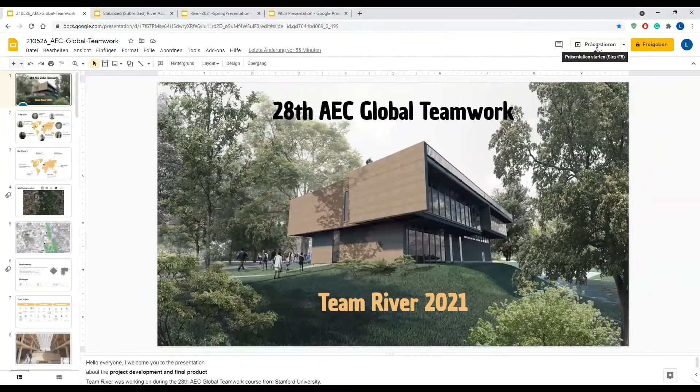Exactly. And I saw, Conrad, I think you need to enable me to share the screen. And then I can directly go into it. Yeah, I'll let you share. Give me a sec. Okay, you should be ready to go now. Yeah, perfect. I will also talk a bit more about the requirements and what the goal of the course was during the presentation. So I won't tell you about that now. Okay, don't want to see myself. You can see the screen? I think, yeah.

Okay, perfect. Then welcome everybody, and I will present you today the project development and the final product of Team River 2021, participating in the 28th AEC Global Teamwork course from Stanford University. And Team River, that's 7 people from 7 universities, from 5 disciplines and 3 different time zones. And the objective of this course was to do collaborative teamwork, to develop our skills in communication, collaboration, and coordination, and as well to set up our mindset to integrate the design, the model, the schedule, and the costs

by building a university building. We were also accompanied by an owner team of 6 owners that were distributed in 4 different countries, and they were mentoring us and advising us during this whole journey. So we met every second week and we showed them our progress and we discussed our ideas. And now I will introduce you to our site, which is located in Weimar, Germany, in the Goethe Park next to the River Ilm. And some site hazards of this site is that Weimar is a UNESCO World Heritage City and it needs to be treated accordingly.

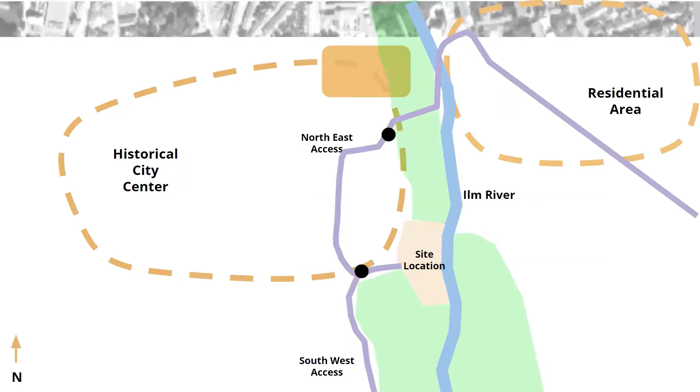Also, we have wind coming from the southwest and tight intersection roads and access roads. But this challenge actually enabled us to really work and focus on a small kit of parts and to have these vehicle restrictions and to integrate them into our design. Also, the hazard of a shallow water table and flood risk was many times discussed, and we found out and investigated several solutions for the different building concepts.

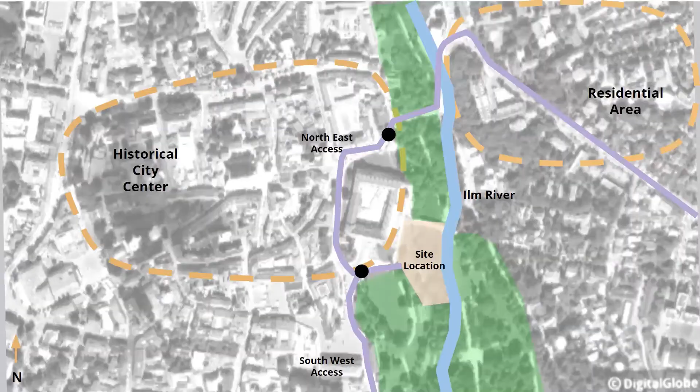So the course is about building, designing, and constructing a 3-story university building for collocated and online courses. And we were given 2 footprints, to see on the right, the L shape and the square shape. And also there were given certain requirements for the functional spaces like the area, the orientation, or the room height. We were also not allowed to build more than 9.1 meters above ground level. And we set our budget to 12 million euro, and it was also restricted to have the construction completed by end of September 2025.

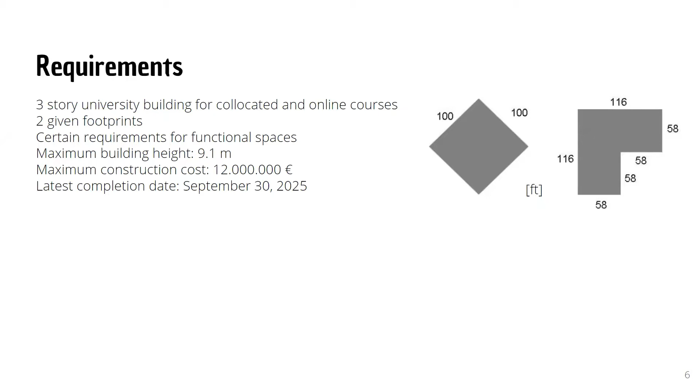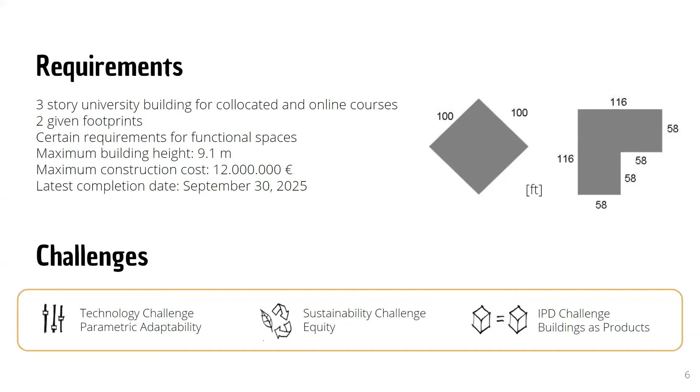Furthermore, there were 3 interesting challenges from the industry partners. So first of all, we had the parametric adaptability challenge from Buro Happold, then the sustainability equity challenge from AR Green Consulting, and the buildings as a product from DPR. And with all these requirements, we started into the concept development phase in the winter quarter, where we were working on 4 different alternative solutions, and in the end evaluated them in a decision matrix approach. And during the project development phase in the spring quarter, we then focused on this winning concept and elaborated the details and some improvements.

We also created further team targets for our team. They were steering our design from the very beginning, and we divided them into the categories design, user experience, and construction and use.

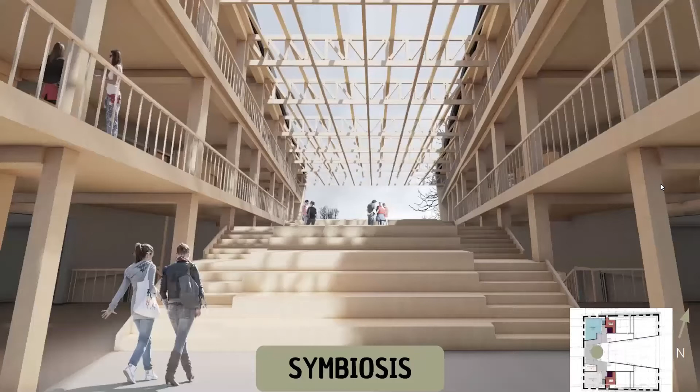And now I'm going to introduce you to our first stabilized concept called symbiosis. So symbiosis is any relationship or interaction between two dissimilar organisms. And there are three subcategories, which are mutualism, where both organisms benefit, commensalism, where one benefits and the other is unaffected, and parasitism, where one benefits and the other is harmed. And symbiosis was one of our main gestures integrated into our building.

So we started with our first concept, which had a quite long cantilever, and this was because we wanted to fit all the room requirements. But there came also the idea to twist and expand the building, which you see in the second concept. But after some mainly structural mentoring, we really found out that this structural system is very demanding and it limits the architecture. Furthermore, we decided we needed to include some of these inclined columns, but they are again taking space away. So we had to step back and do some more brainstorming and interdisciplinary coordination.

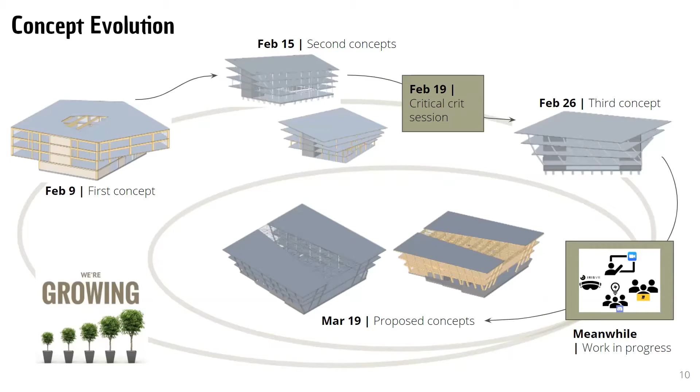And that led us to the decision that we can either expand our building or twist it. And also there came the idea to have this stepped basement you see on the bottom right picture. And with this, we gained more space below the ground, and also it solved the problem of the shallow water table. And this led us then to this proposed concept, symbiosis growth and symbiosis mesh. Our architect had the overall vision to strive for mutualism, accept commensalism, and avoid parasitism.

The structural engineers were on one side focusing on sustainable materials like glulam and CLT. And on the other hand, we were working with steel and 3D printed smart slabs for integrating the MEP ducts and the connection to the columns. Our MEP engineer was firstly focusing on building orientation and also on the relocation of some trees in the park. And then we decided for a primary system to use the electric boiler for the growth and the ground source heat pump for the mesh. And this was complemented with secondary systems like displacement ventilation and radiant floors.

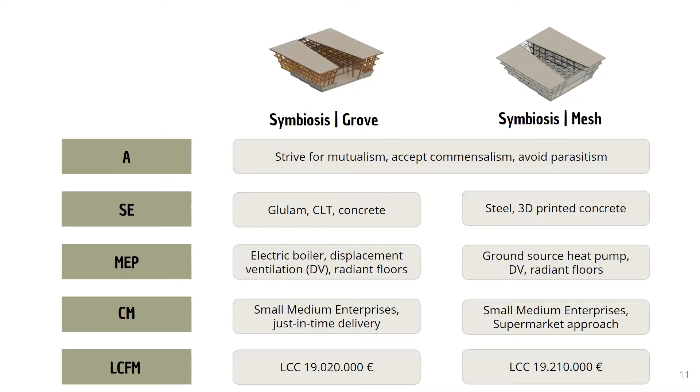And for both concepts, our CMs decided to use sustainable small-medium enterprises. The material for the Grove was provided by just-in-time delivery, and for the mesh, we had an offsite storage, which led us to focus on the supermarket approach. We also had a lifecycle financial manager in our team, and he focused on risk management, sustainable target value design, and he was also calculating the final lifecycle costs.

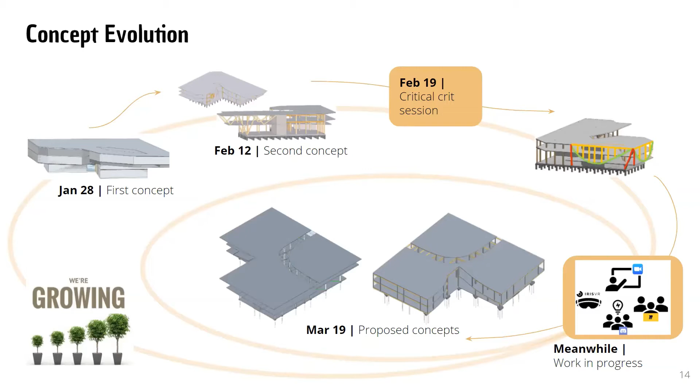Again, for this concept, we had very long cantilevers in the first and second concepts. And with some mentoring, we knew that we actually should prepare different structural systems for the different materials chosen. So we were working on more solutions for this cantilever, like, for example, the queen post trusses you see on the right. But we were not really happy with this solution. So we again did more brainstorming and coordination, and we decided to rather have less cantilever, but have it on more sides of the building. And this then resulted in the proposed concept, Next Year Spring Sprout and Next Year Spring Steel Flower.

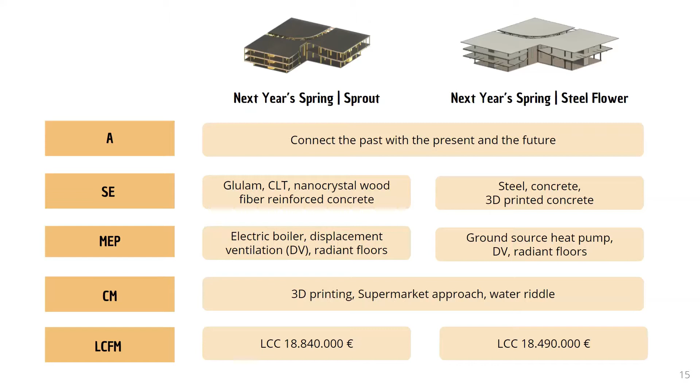So our architect focused on connecting the past with the present and the future, with a main focus on the rammed earth. And the structural engineers were again working with sustainable wooden materials like glulam, CLT, and this nanocrystal wood fiber reinforced concrete. And on the other hand, for the steel flower, we were again working with steel and more innovative solutions with 3D printed concrete. Our MEP was again working with the building orientation and also focusing on the rammed earth insulation. The construction managers were mainly focusing on the 3D printing process, because for the sprout, we planned to 3D print the formwork for the slabs, and for the steel flower, we were planning to directly 3D print the concrete slabs.

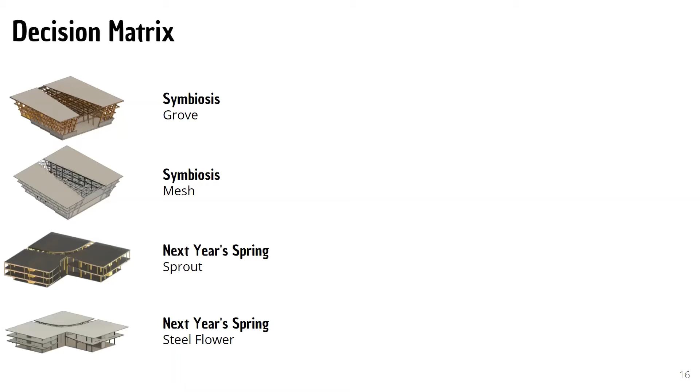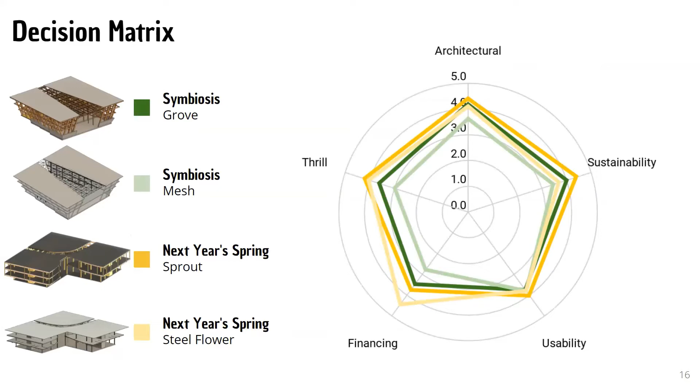And at the end of the winter quarter, we then evaluated these 4 concepts in a decision matrix approach. And we had a few criteria like sustainability, architecture, thrill, usability, and financing. And the winner was then next year's spring sprout. And in the following slides, I will show you which aspects we focused on during the spring quarter and what we tried to improve for this next year's spring sprout.

So first of all, we integrated a further approach, which was intergenerational equity. But what is intergenerational equity? So it's conserving fairness and resources for future generations. And with this, we were actually impacting all 3 pillars of sustainability: the environmental, the social, and the economical.

Also, we focused more on the 3 challenges, what our goals are, how we approach them, and how they impact the future. So for the equity challenge, we decided to work with low CO2 impact materials, and with our green roof, we added a new layer to the park. For buildings as products, we decided to develop a small kit of parts of our building elements, and we introduced key performance indicators to measure the acceptance outcome.

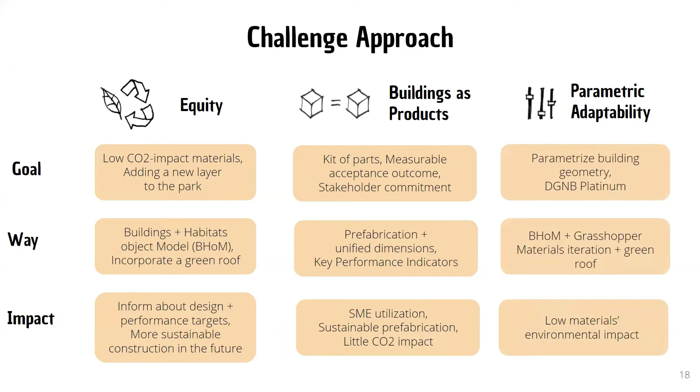And for parametric adaptability, we parametrized our building geometry, mainly the rammed earth walls. And by doing material iterations and including this green roof, we aimed to reach DGNB Platinum. DGNB stands for Deutsche Gesellschaft für nachhaltiges Bauen, and its certificate measures sustainable construction on the basis of several criteria.

One benefit of the public-private partnership between us, Team River, and the university in Weimar is the allowance for an involvement of SMEs and teaching the next generation workforce. This involvement will be through a 10-year VR lab established by the university, and this informs the SME Sustainable Prefab Product Library.

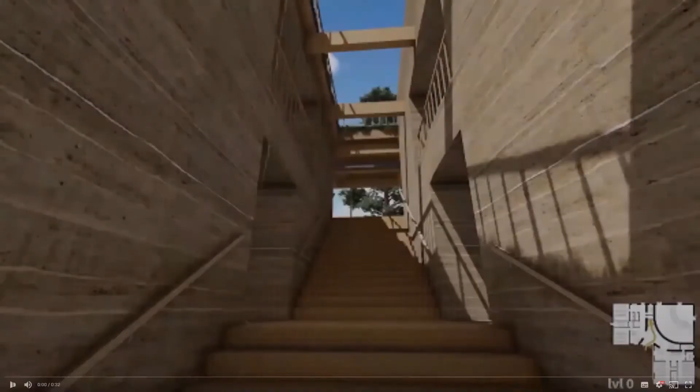And now we start a walk into our building. On the sides, you can see interactive information touch walls, where, for example, information about accessibility for people in wheelchairs or upcoming events is displayed. If we go up, you can see that the middle part is provided with a lot of light. And you can also see these curved rammed earth walls, which are load bearing.

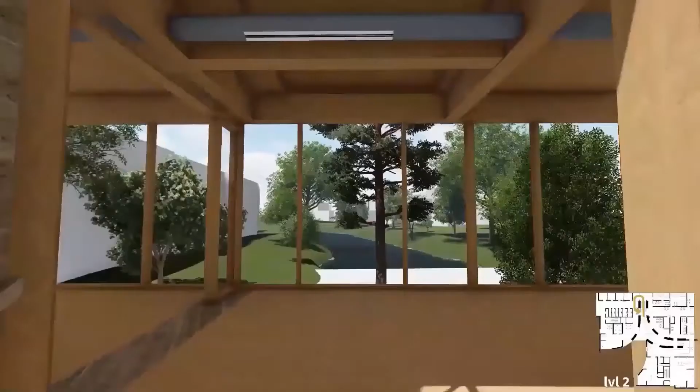There was a quick view to the auditorium, and now we go up through our glass fire protection doors to the student area. And here the more regular rammed earth walls are highlighting the framing.

We solved many integration challenges, but I will just show you some selected ones here. The lateral structural system is composed of the internal rammed earth walls and the CLT shear walls as cores. And for framing and floors, we moved away from using glulam and concrete and now use softwood and CLT panels instead, mainly for sustainability reasons.

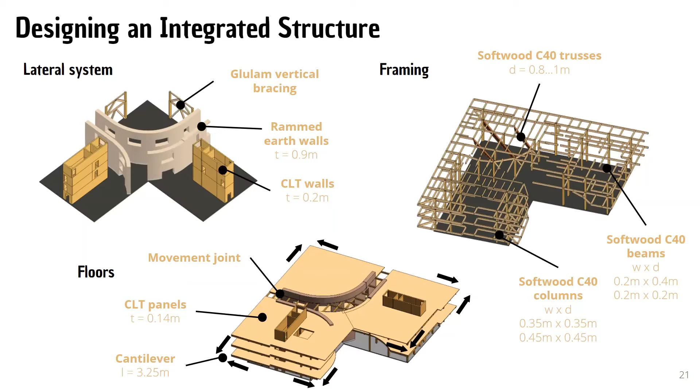This material choice had a positive impact on our building's global warming potential, which was measured with a BOM LCA tool. I will introduce this to you later. Also, it emphasizes how we connect the past to the future. And furthermore, we decided to follow a very regular structural system, which helped us to stick to our small kit of parts.

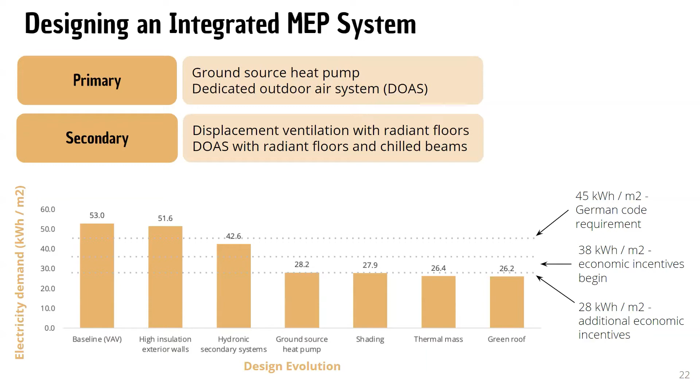The MEP system selection was driven by the local environment, energy efficiency, and unique properties of our building. The ground source heat pump is our primary system due to its compatibility with our site. And the rammed earth physical properties enabled us to use secondary systems which previously were not considered. This allowed us to focus more on the optimization of the ventilation systems.

So now we are located in the open student area on the second level, where the students get a chance for informal interaction with professors, and they are also provided big and open working areas. And the big facades open up the view to the beautiful Goethe Park.

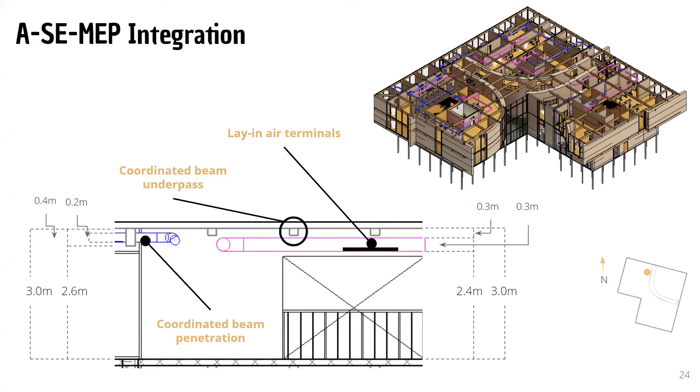We coordinated MEP and structure systems by beam underpass and beam penetration, with consideration to only penetrate in the middle 50% of the beam span and the middle 50% of the beam depth to avoid the shear and moment critical zones. Our goal was also to reach a minimum of 40% prefabricated items, including rammed earth walls, beams, CLT floor panels, columns, ducts, and curtain wall panels.

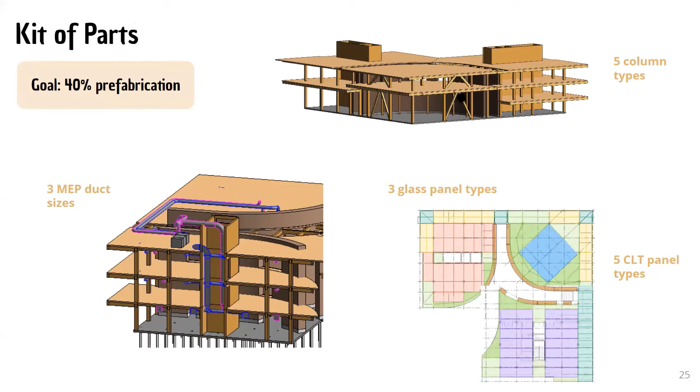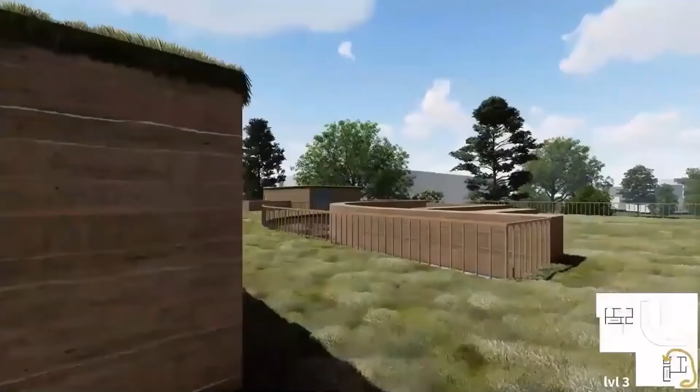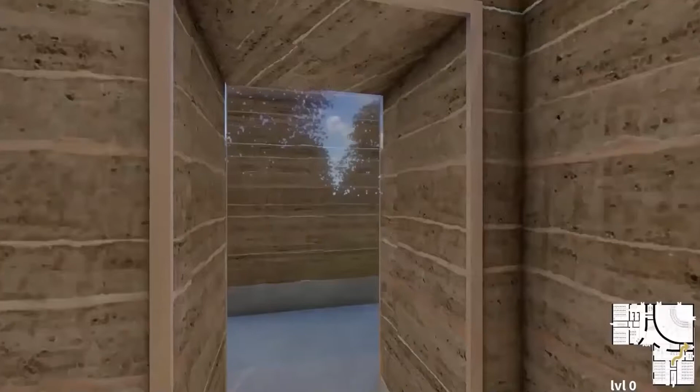The green roof we integrated into our building you can see here, and we also see the continuation of the load-bearing rammed earth walls, which provide shelter from the southern wind. Rammed earth is a central and sustainable material. It regulates the indoor humidity, it provides good thermal mass, and it's beneficial in terms of cost and availability. And here on the ground floor, you can see this gray layer. This is a 40 centimeter concrete layer, which provides flood protection to the rammed earth.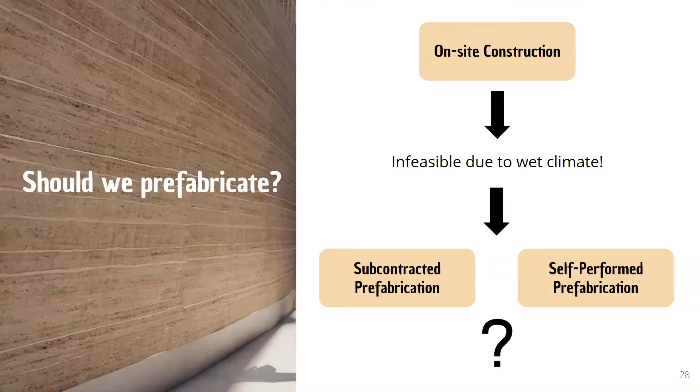Building with rammed earth is not so common anymore, and we had to ask the question, how do we construct these walls? So we were looking into on-site construction, but it's infeasible due to the wet climate and the flood risks. So we investigated subcontracted prefabrication and self-performed prefabrication. And using 3 KPIs, we verified that self-performed prefabrication is preferred from an environmental and an economic aspect.

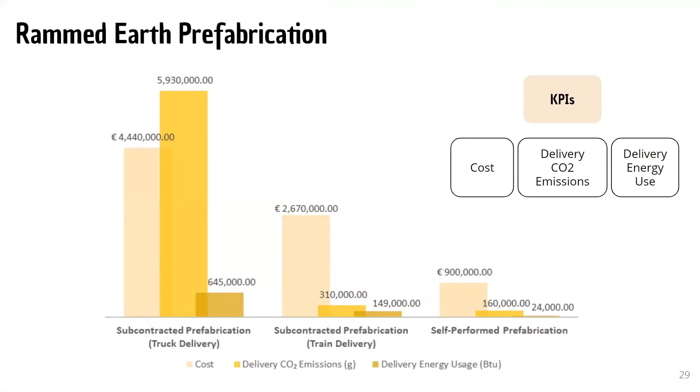And this approach allowed us to focus more on the intergenerational equity again, by teaching the next generation workforce about rammed earth, how it's going to be constructed, and what their benefits are. And besides the prefabrication of the rammed earth, it was also parametrically designed. So from the initial idea, which came from our architect, we had to unify the radius such that we can reuse the formwork. And the formwork is actually the most expensive part when building with rammed earth.

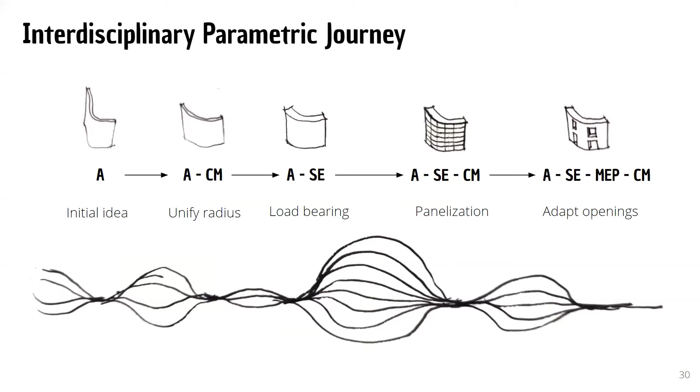In coordination with the structural engineers, we decided to make the walls thicker, such that they are load-bearing. And to follow the vehicle constraints, we had to panelize the walls. In the end, we were also able to adapt openings to the different needs from the disciplines. The building blocks were designed with 4 different parameters in Grasshopper, and they allowed for adapting to changes in the building process.

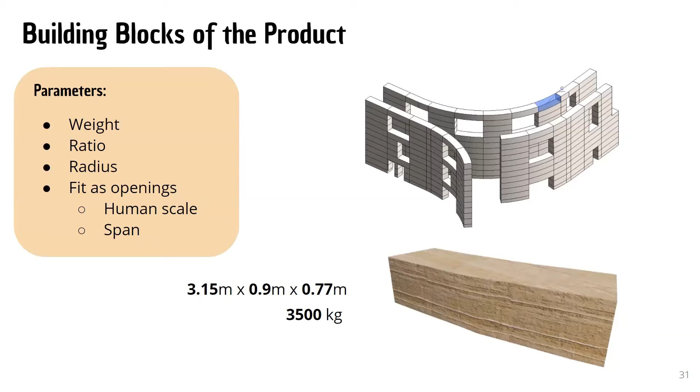So our process goes from procurement to closeout, and our first stop is at the SMEs. So most of our suppliers were around 20 kilometers away from our site, and they were uniquely identified to take care of the kit of parts and a sustainable construction process. Then the supermarket is the home to the prefabricated packages. And it is also where the rammed earth walls are fabricated by the next generation workforce. But I have to add here, it's only the architectural rammed earth walls. The structural ones will be prefabricated by professionals.

So we then move into the quality approval and the quality control for the rammed earth, which is at the Bauhaus University in Weimar, and it follows the same procedure as for concrete testing. The kit of parts and the rammed earth blocks are delivered to site, and can be assembled with the cranes. And using this process and the prefab rammed earth, we are utilizing 93% of our building system from SMEs, and we initially were aiming for 70% there. And we are also at 52% prefabrication when our goal was 40%.

Our process, the life cycle financial management, is seldom applied in construction to its full potential. And through the integration with our life cycle financial manager, we were able to use multiple optimized schedules through ALICE, then the procurement dates from Manufacton, to find the best value for money through liquidity planning. ALICE is an AI schedule optimization software, and Manufacton is a program that links the BIM model and acts as a centralized order and production tracking system. So it helps to track the stages which the supply chain is at, and also it monitors the performance of the prefab packages.

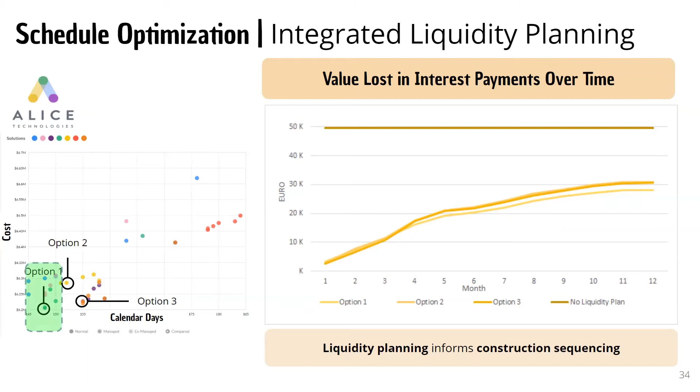A liquidity plan was used to divide the loans over a known period of time. And when there is no liquidity plan, the interest paid is almost twice as much. So comparing the top 3 optimized schedules from ALICE, we found that option 1 with 2 curtain wall crews is the winner. And we were able to save 21,000 euro that would have been paid with no value added.

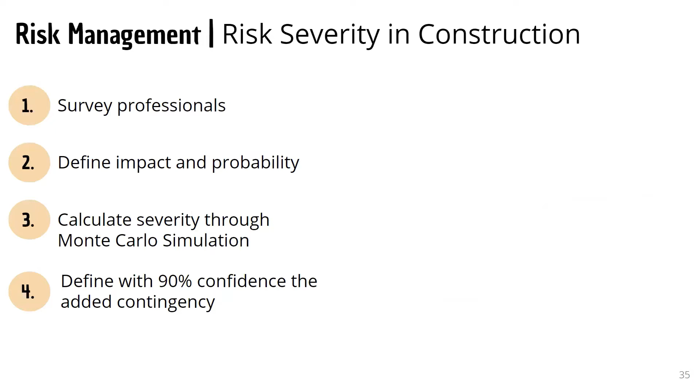Our next step was to look at the risks in and out of construction. And by surveying mentors, we gained information about the impact and the probability of occurrence of accepted risks in construction. The 2 main risks were flooding and the next generation workforce. And their impact and probability were defined and multiplied together to get the severity, which could be predicted with the Monte Carlo simulation.

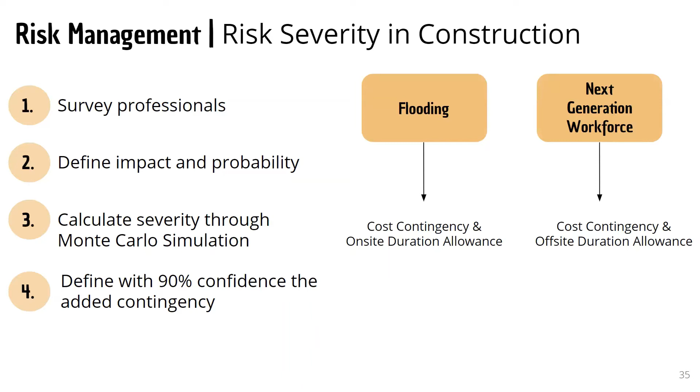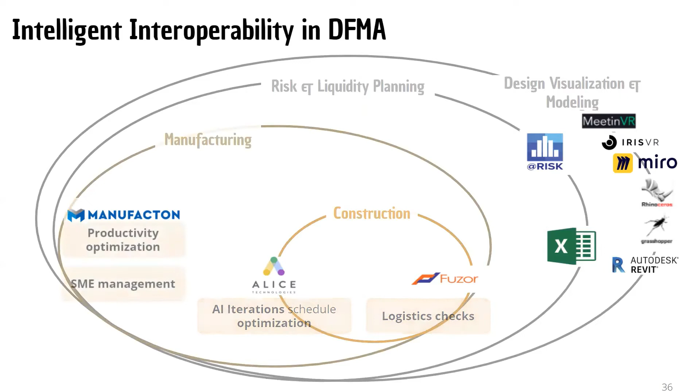So before I take you on the on-site assembly, here's a peek at our intelligent interoperability in design for manufacturing and assembly. In construction, we integrate ALICE and Fuzor to investigate scheduling and logistics. Fuzor creates 4D and 5D simulations of the BIM model and helps to ensure project delivery on time and on budget. Manufacton is used to optimize the productivity and track the supply chain.

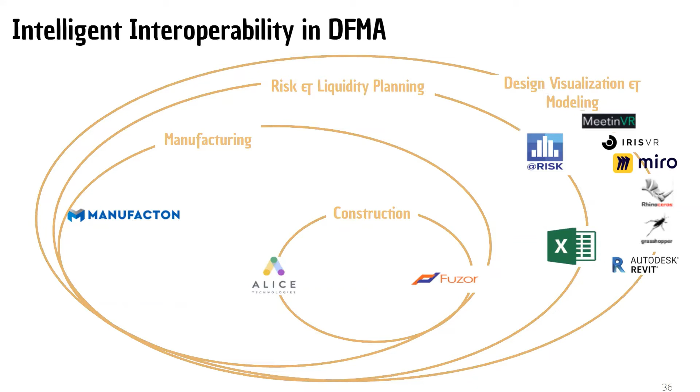And after that, we move into a life cycle with liquidity planning and risk management, which informs supply chain and construction. And in turn, it iterates the design through visualization in MeetinVR, IrisVR, and Enscape, and modeling in Rhino, Grasshopper, and most importantly with Revit. It combines most of the technical software we were using. And using all of this, we created our 5D green design for manufacturing and assembly.

At first, the site had to be excavated and backfilled. Then the self-draining micropiles were installed and the concrete poured and waterproofed.

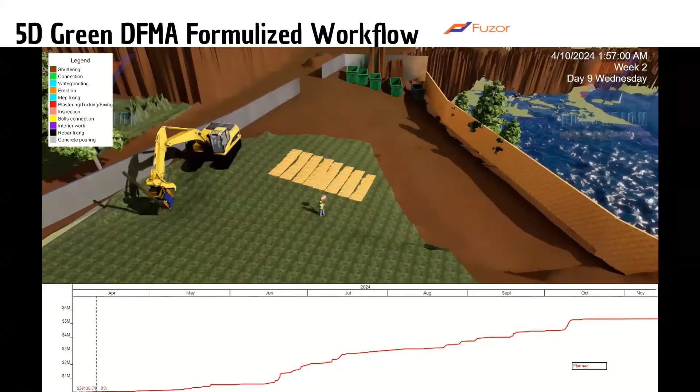Yeah. And this foundation solution helped us to avoid the risk of a shallow water table. On site, there are also 2 laydown areas where the trucks are arriving from the warehouse, and then the cranes unload the trucks and place the elements at the correct position. Our tower crane could reach the entire building footprint, and the mobile crane could only reach 2/3 of it.

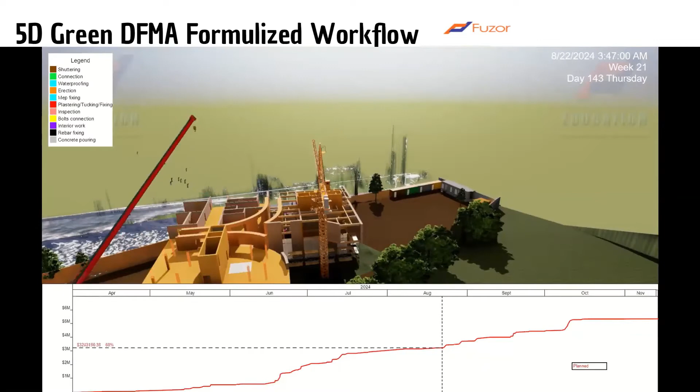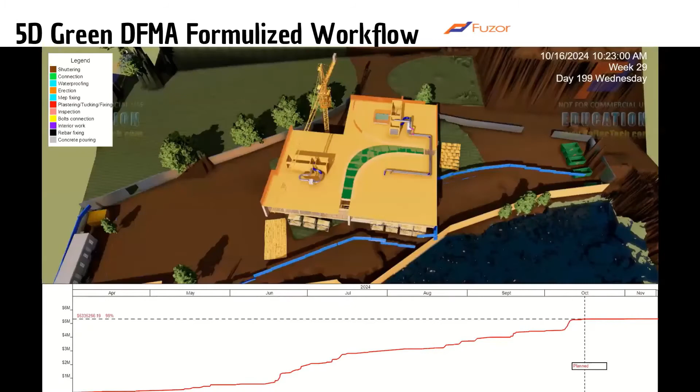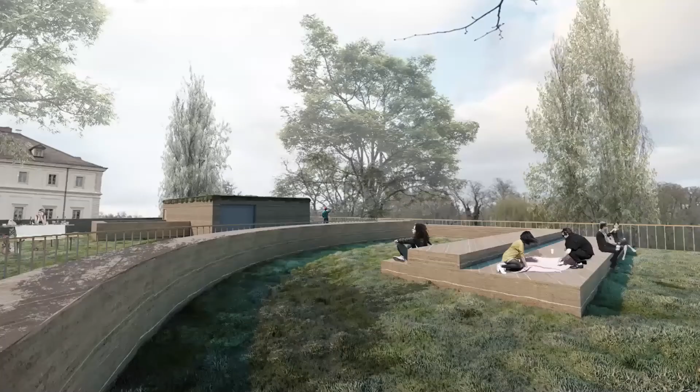And this video is also showing the flood event. So the construction stops during flooding, and the site is secured by flooding barriers. A permanent earth embankment protects the building from being flooded after the construction phase. And after 227 days, the building is completed. And now let's take a quick pause on our green roof before I show you how our building performed against our goals and targets.

So we tracked our building performance against the DGNB standard, and we achieved platinum certification through key design changes such as incorporating a green roof, utilizing softwood framing, implementing a liquidity plan, and green construction, which put in place pollution plans and low noise electric equipment.

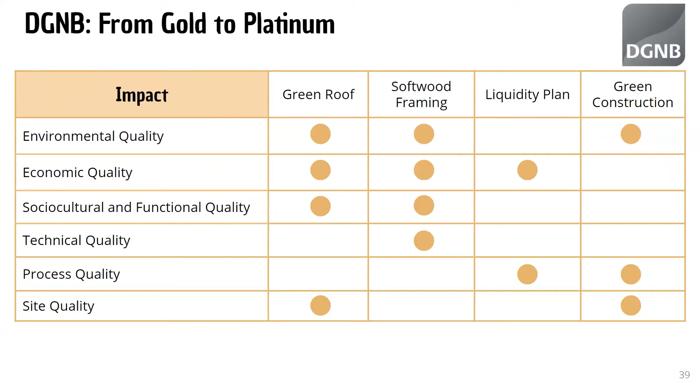We also monitored the environmental and financial impacts of the proposed design changes using the sustainable target value and the target value design tools. So for example, we considered switching from 3D printed concrete slabs to CLT slabs for design and constructability reasons. And we confirmed with the STV and TVD that this change kept us within our targets.

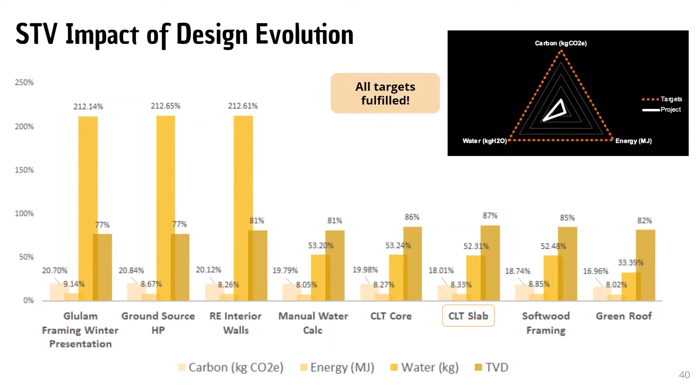And to better understand the impact of these materials, we used this Buildings and Habitats Object Model, BHoM, and its lifecycle assessment toolkit. So this enabled us to understand the embodied global warming potential of our actual materials against the evolving geometry of our building.

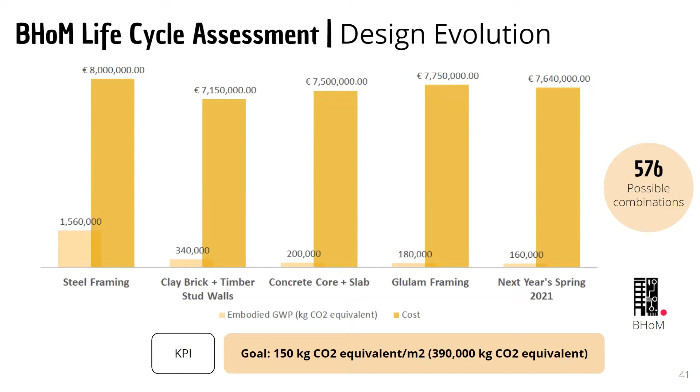And we analyzed 576 material combinations by parametrizing Revit geometry, utilizing the BHoM to transfer it to Grasshopper, and then varying material options for the slabs, core walls, interior and exterior walls, and structural framing. And we also evaluated the impact on the TVD because a cost-effective building was our key goal.

And now let's dive deeper into the TVD performance. So following the crit session on February 19th, we moved from a rough RSMeans estimate to the BKI Kostenplaner, after which we consistently fulfilled our targets. So a key update was the decision to omit the 3D printed concrete slabs and commit to self-performed prefab rammed earth. We implemented a green roof and updated our general conditions based on our offsite process.

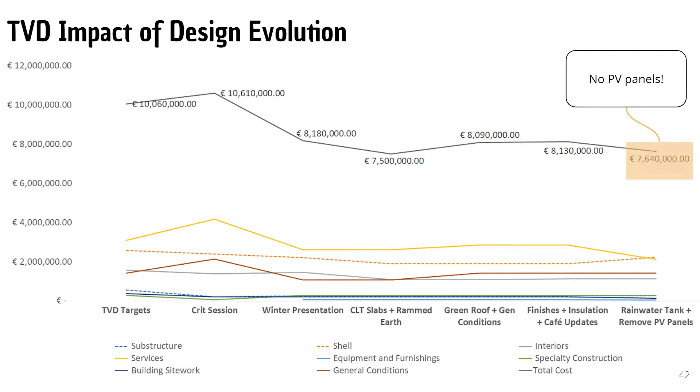This increased our cost a little bit, but with further updates, for example, the removal of the PV panels, the cost dropped down again to 7.6 million euros. And based on this framework and the framework of our PPP contract, we estimated our annual rent to the owners. So we used a rough estimate of the annual costs for maintenance and operation to set an approximate target value. And this leads then to the final life cycle costs of 18.6 million euros.

To wrap up the challenges, I will point out the, to us, 3 most important approaches for each challenge. And I start with the building as a product challenge. So by using sustainable industrialization and stakeholder commitment, we were able to achieve our KPI goals with 93% SME utilization, 52% prefabrication, and 62 kilograms per square meter CO2 impact.

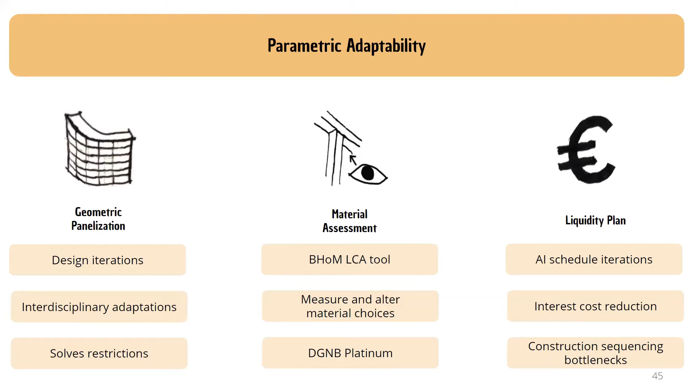On the parametric adaptability, we used Grasshopper to panelize our rammed earth walls. And to reach the highest DGNB certificate, we assessed the impact of our selected materials with the BHoM LCA tool. Also, we created a liquidity plan to save on interest costs with the AI-created schedules.

And for the equity challenge, we focused mainly on our idea to connect the past with the future in intergenerational equity. Also, we focused on the integration into the regional culture and avoiding a negative impact on the future. And with that summary, I'm very happy to mention that we won 2 of the 3 challenges. So we won the Sustainability Equity Challenge and the Parametric Adaptability Challenge.

And with that, I want to show you our technology journey. So this chart visualizes which software helped us the most and was most integrated into our work. Some software was used only by a few disciplines or just by one, and others had an impact on the entire team and were really used on a regular basis.

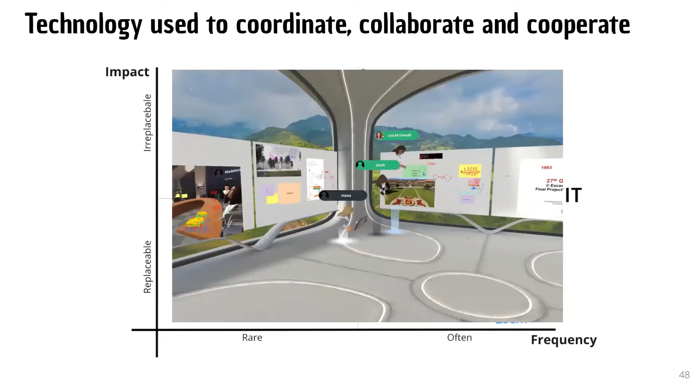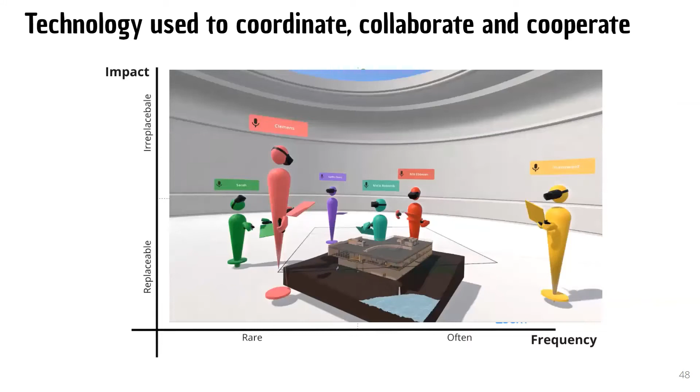So here I would like to mention MeetinVR. As we never met in person, the VR software helped us to feel a little bit more connected. Another VR software is IrisVR, and this allowed us to see our building in reality and also to walk through, do clash detection and clash avoidance.

And the last software I want to point out is Miro, which we often used. Miro is an online whiteboard, which helped us in the early stages a lot with brainstorming and problem solving. And to further give you an overview of our weekly process, I will present you a week in our life during this course. So coordination, collaboration, and cooperation were accompanying us through the entire ASC journey.

Normally we started our week with updating our tasks in Yali Visual Planner, where we previously created a 2 to 4 weeks look-ahead plan. Then we used the message platform Discord to fix our meeting dates, and also as an information exchange. When we had a meeting, we met in MeetinVR. This allowed us to shake hands, and we also did a quick stand-up report. After that, we normally moved back to Zoom for further discussions or decision making.

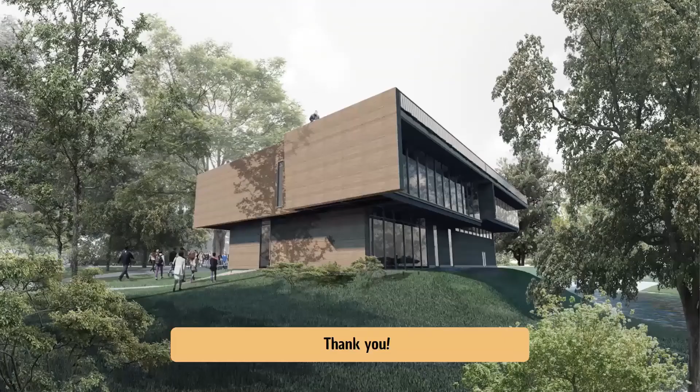Our ideas were evolving in Miro, where we developed all of our project. Afterwards, we were modeling it in Revit, documenting it in OneDrive, calculating it with Excel, and in the end, walked through with IrisVR. And yeah, there were several iterations needed, so we started again in Miro, and the whole process starts again. And this leads me to the last slide. Thank you very much for your attention. I'm very happy to answer any questions or doubts.

Thank you very much, Lisa. It's quite impressive you're able to explain not only your parts, but also the parts of your teammates so well. So congratulations on a really clear presentation. Thank you. Yeah, so maybe we just start with questions from the group, and I have some later, but I'll let others start first. You can go first. Nice work.

My question is, I know about the course, but I don't really know the details of it. Have you considered integrating sustainability into your design, like using reused materials or products, or did you directly go to primary raw materials? So we mainly use primary raw materials, but for the rammed earth, which is from excavation material, we were focusing on using either our excavation material or material from construction sites nearby, not new material. But for the wood or the concrete slab, we focused on primary elements, though this is an improvement possible with more time.